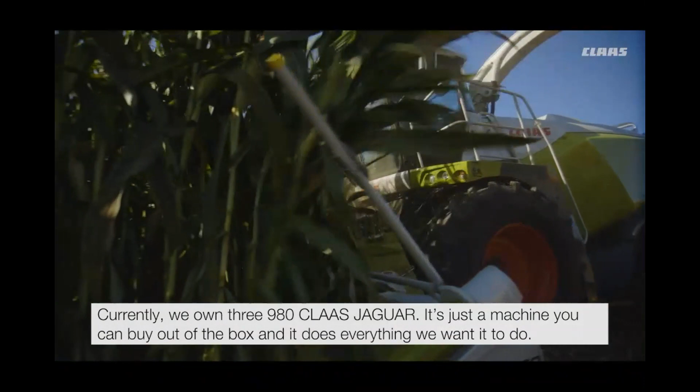My name is Frank Borba. I'm from Modesto, California, and I have a custom harvesting operation. Currently, we own three 980 CLAAS Jaguars. It's just a machine you can buy out of the box, and it does everything we want it to do.

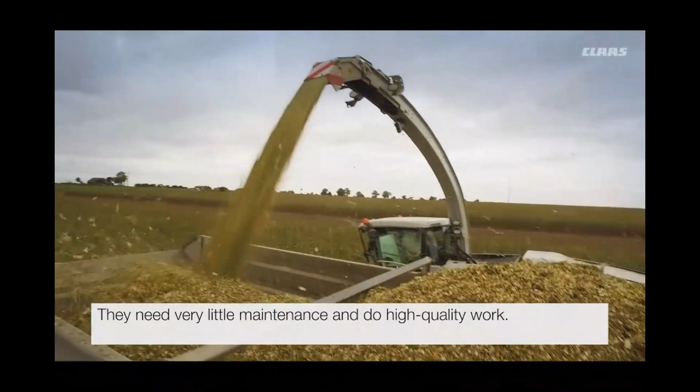I think we've been using CLAAS for 18 years. If there's not a problem, you don't try and fix it.

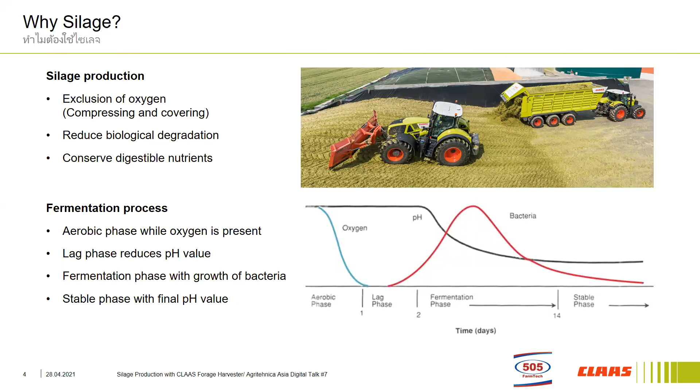Most end users store silage much longer. From day 14 onwards, the stable phase begins, where the silage is conserved in the bunker and stored for a longer time. This means that silage is used as a high quality feed year around.

That's an important point. As mentioned, you need to conserve it to store it longer for year-around feed, so that even when you're not able to grow crops, go into the field, or harvest, you still have a high-quality feed stored in the bunker at your farm. And as Katharina already mentioned, a good silage is not more expensive than harvesting a bad silage.

In most Southeast Asian countries, we now see a change mainly from tractor-attached forage harvesters to self-propelled machines. We'll come back to the technology later, and see why even a bigger machine, where the investment cost is for sure a bit higher compared to a tractor-attached forage harvester, pays back later on. Dr. Ekapop will also share his experience there.

Why does silage quality itself matter? Looking at the effect on milk yield, for example, in dairy products - what can affect milk yield? For sure on one side it's the cow breed. It can also be the season of calving, the geographical region where the farm is located and where the crops are growing, and the frequency of milking.

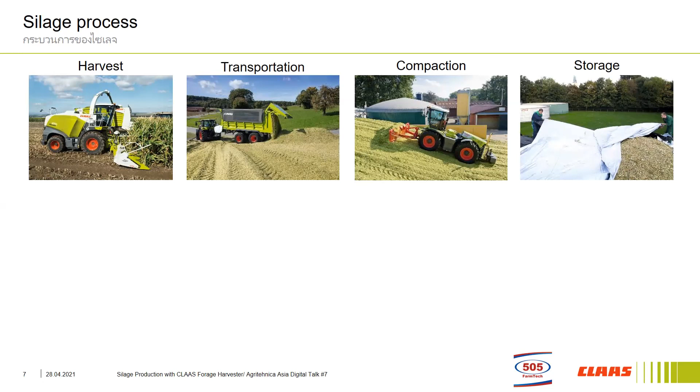Also for storage, covering the material is important later on. We saw in the first video, Jaguar working worldwide, that silos look a bit different everywhere in every country, but there's always a cover foil on top. Some farmers put tires on top, or sand, to hold the foil in place and to add weight on top of the bunker, ensuring that no oxygen can get in and that the fermentation process can start inside the bunker for conserving the material.

What is important here in the silage process? For sure, the right harvest time, so the dry matter content of the harvested plant, is important to ensure that the silage is later on in good quality.

Also, the ideal cutting length is important. We had a trend in the past years that is already going the other direction again. 15, 20 years ago, everybody was cutting the material as short as possible. That is, for example, necessary when you like to feed such a silage for energy production - we will come to this part later. But especially for animal feed, sometimes we have the technology to chop longer, while also having good processing of the material, to increase animal health with longer cut material.

The third pillar here is material processing. There I will mention the difference in the walk around compared especially to tractor-attached forage harvesters, and also what we can do to help the fermentation process. We can add silage additives to the material - that's directly possible with the Jaguar. So the Jaguar can spray these additives on the material to ensure that it can be properly stored later on.

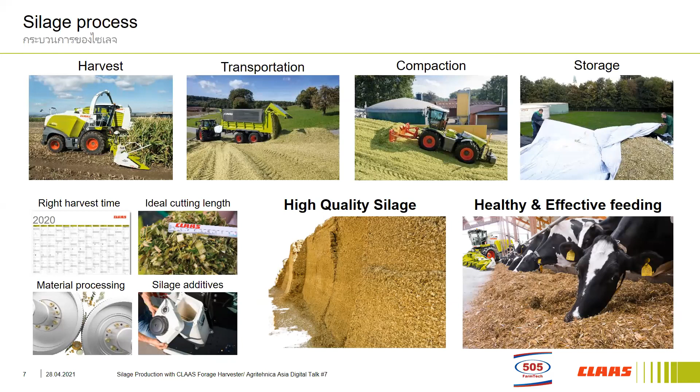So now coming to the point of why a CLAAS Forage Harvester, I would like to swap to a short video which we will present to you. We already produced more than 40,000 units of our Jaguar, which we sold worldwide. I would like to give you a short introduction via the video, which will be shared, and later, directly after the video, I will swap to the live walk around where we see the Jaguar inside via the live camera.

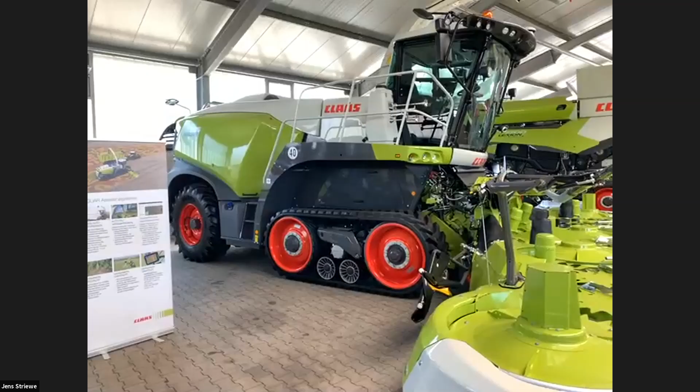Yeah, so I hope you enjoyed the video.

I always get goosebumps watching the video again and again. I never get enough of such a video.

I hope you can see the camera video. Maybe we have the chance to increase the size, or you can do that on your own, to have this live video in full screen.

So in the video, at the end, we saw such a big machine, our flagship, the Jaguar 990 with the track system in the front - that is our newest development for our forage harvester. You saw the history where we started with the forage harvester, and where we are now with this machine. Just as short side information, for Southeast Asia we only sell the wheel machines.

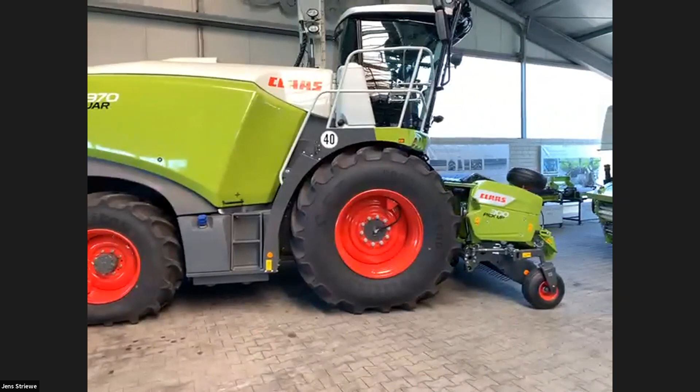So we will now swap from the TerraTrac machine that was the last machine in the video to such a machine, which is basically technically the same, just with a tire in the front, a bit shorter. And here we see our Jaguar from the 900 series. We have an 800 series available and a 900 series - technology-wise, as mentioned, they are the same.

So the principle of our Jaguars is the same in both series. It's just a question of what is the application of the machine later on, how much material needs to be harvested, and what material needs to be harvested, to select the right machine size and specification. When we look into this machine, it looks, I think, pretty nice and shiny from outside, but it's very hard to see what is inside.

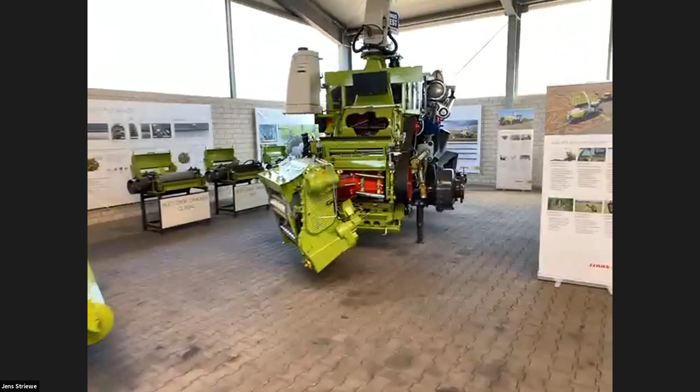But therefore, we will go over now to our model here, where we have basically the heart or the insides of the Jaguar placed, where we can have a detailed look at what is inside. So everything that we see here is the same as it is in this machine, just without covers and with direct access to see everything.

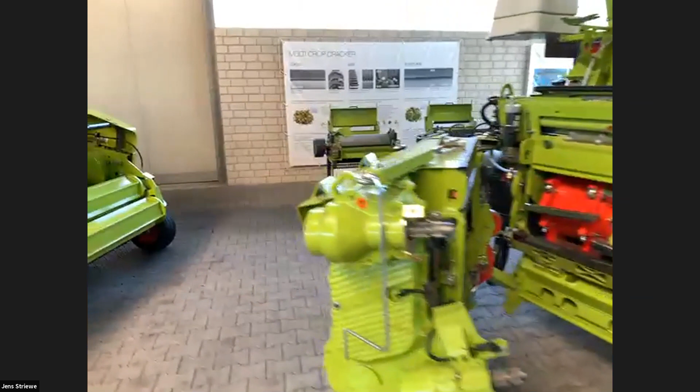It starts for sure with the correct front attachment. So here we can see a pickup - we will see that later in the video as well - for collection of swaths for raked material, for grass collection, for grass harvest, but also for straw harvest as an example in some countries, and later we will see this in a new application.

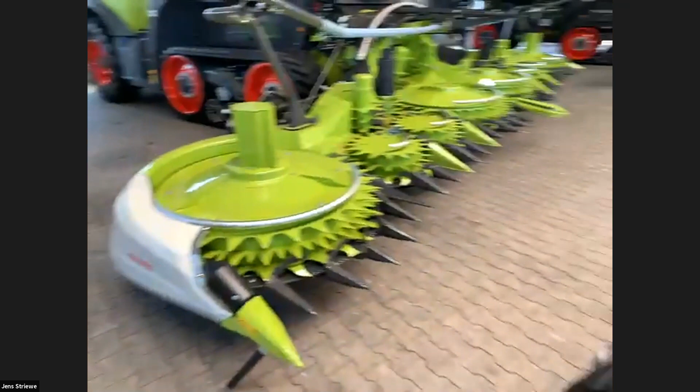It starts with the selection of the right front attachment. This front attachment is attachable, so we can exchange it. Looking back here at this machine, we can see there is a different front attachment for harvesting, for example, corn or napier grass. So that's for direct harvest.

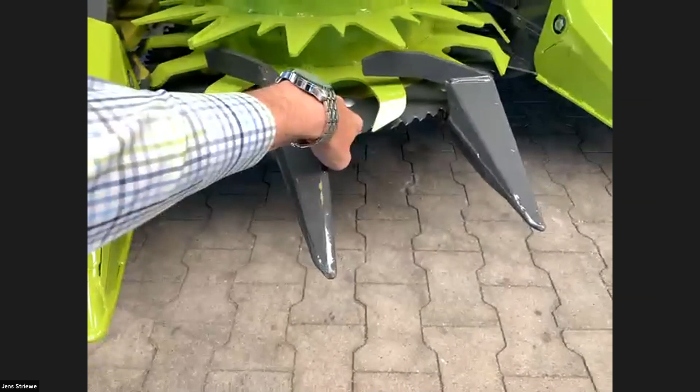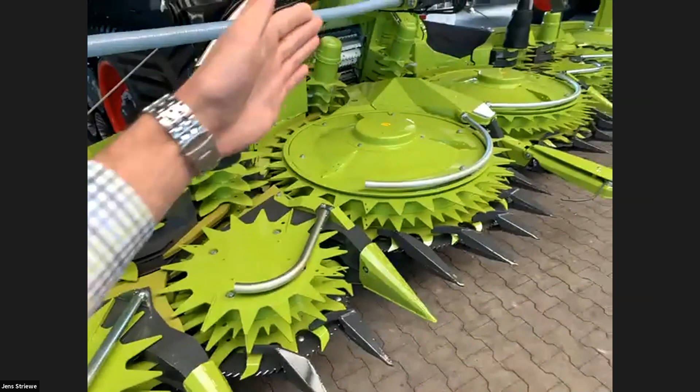We can see here at the bottom the cutting discs on the bottom of the whole drum. The drum turns to move the material inside the machine, feeding it into the pre-compression feeder housing, and that is where our model starts. So that's what we can see here.

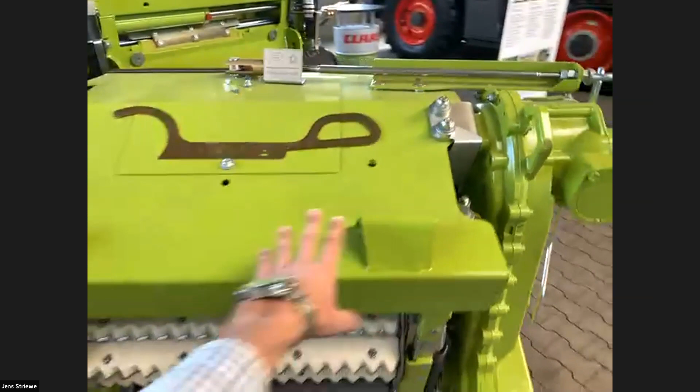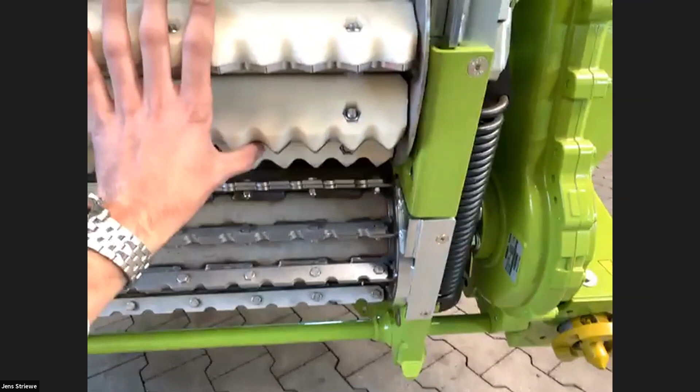These are the hooks where the front attachment will be hooked onto the machine, and the material, whether from the pickup or from the ORBIS we just saw on the front attachment, is fed in between these compression rollers. These feeder rollers turn, feeding the material into the machine, but they also pre-compress the material. You can see these big springs here on the side, pressed together to ensure the material comes in correctly before reaching the cutting drum, because when the material isn't compressed correctly or isn't coming in the right direction, that affects the silage quality, or let's say the chopping quality. So material comes in here.

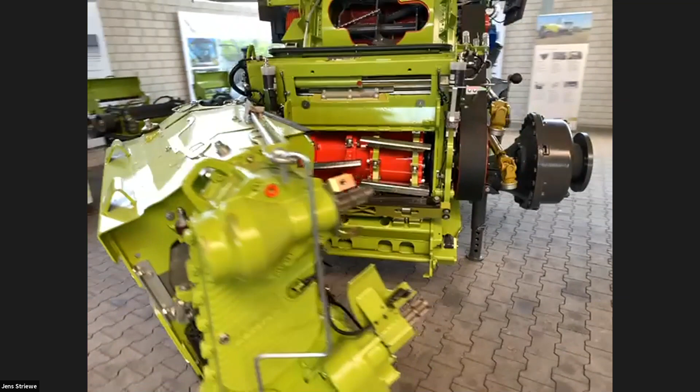The feeder house is openable for easy access to the machine, for maintenance and cleaning points. This is the back, usually closed, just opened now for a better view inside. The material comes from the feeding rollers here on the left.

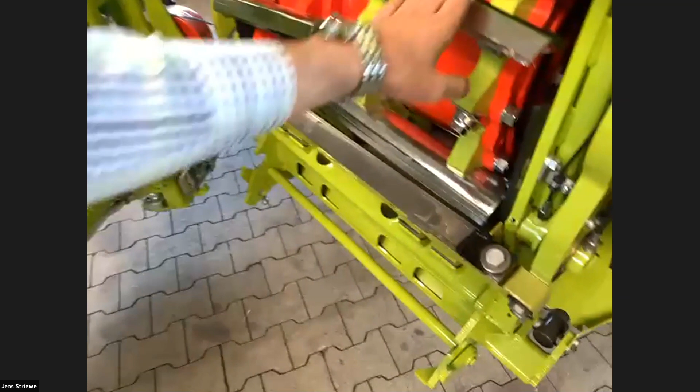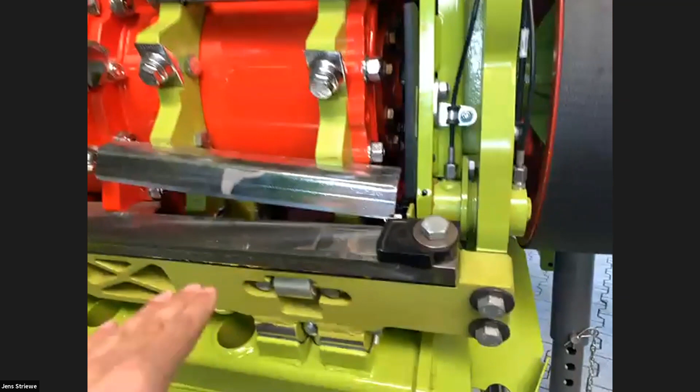It comes into the knife drum here. You can see a really big chopping drum, with the knives bolted on, and at the bottom the shear bar. The material comes in on top of the shear bar. The drum rotates very fast, and the knife cuts the material directly on the shear bar according to the length adjusted in the machine.

We'll later come to the point that we have different chopping drums available for different customer needs. It depends on the application, whether it's for animal feed or energy production. We can select different chopping drums inside the machine, different numbers of knives according to required cutting lengths, and we can also change the material of the knife itself, for example for grass harvest versus corn harvest.

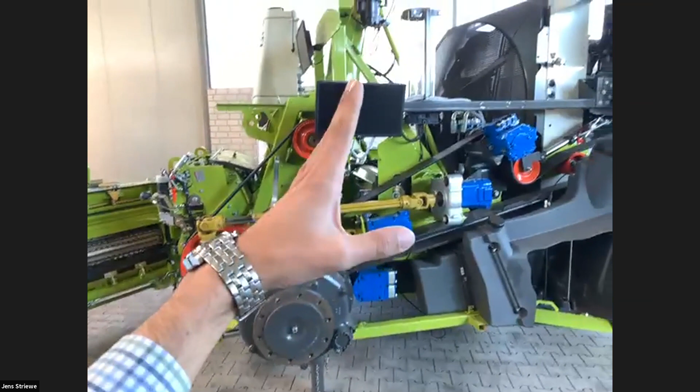So material comes in, we have the big chopping cylinder here. Looking at the side, the material comes in and the crop flow happens right at the beginning of the machine. On top here there's already the spout where the material comes out, right after the cabin. So the whole crop flow happens here at the beginning of the machine.

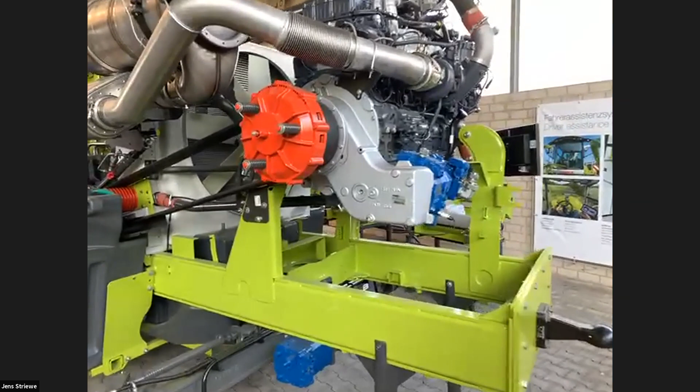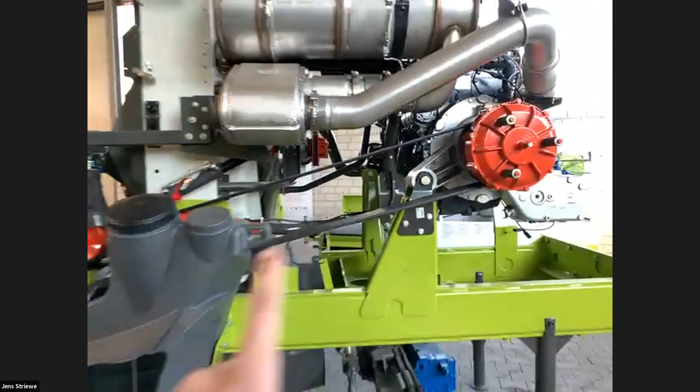In the back we see the cooling package and the power package, the big engine, and the drive concept, something I'd like to mention about our machines. The engine is completely in the back, positioned across the driving direction. On the main pulley of the engine we can see this really wide, big belt, which runs from the engine pulley all the way down to the chopping drum. So we have a direct connection of the chopping drum with the engine, and it's a really big belt, not just a string.

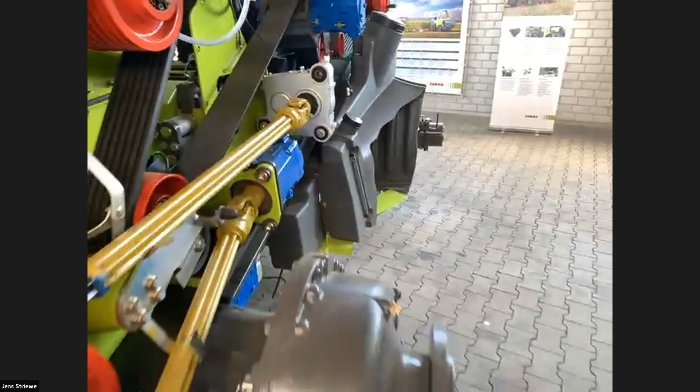This relates to the efficiency point we mentioned, of how to produce silage with a CLAAS Forage Harvester while getting maximum output, running on best efficiency and lowest fuel consumption. This is a key part of that: having a direct connection via such a belt from the engine to all the turning components, rather than big gearboxes where efficiency would be lost.

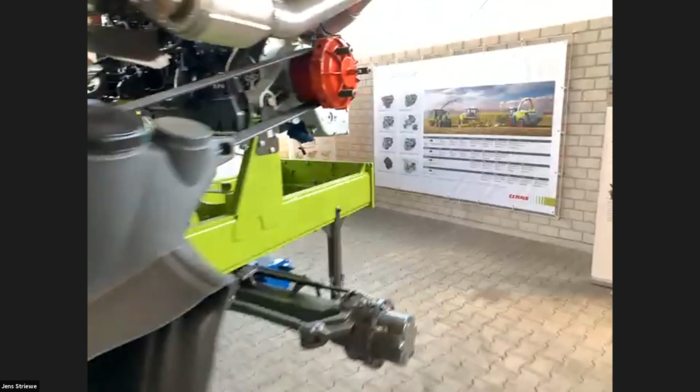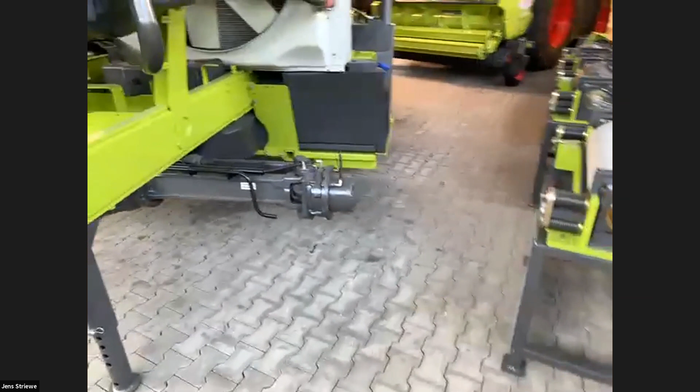Machines are available also with four-wheel drive, which is standard for Asian countries. All machines we sell in Southeast Asia have a four-wheel drive axle as standard, to ensure the machine can work properly even in muddy conditions.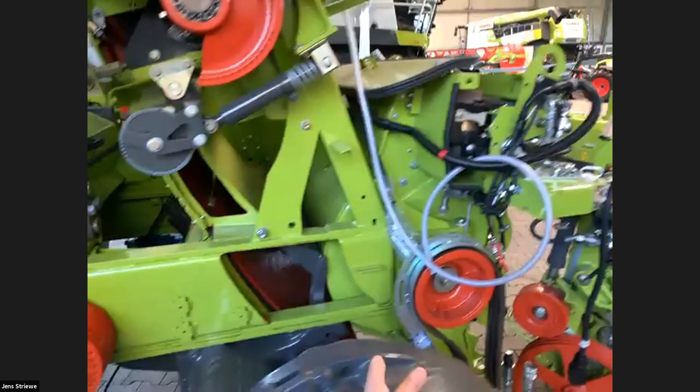Jumping shortly back to the crop flow, we saw this pre-compression unit in the front. We saw here the chopping drum, and then the material comes out of the chopping drum via this tunnel, via this bottom plate here to this position. And here in this position, there's now the so-called grass chute mounted. So here the material, just for grass, is coming from the chopping drum and going up to the accelerator, which is on top.

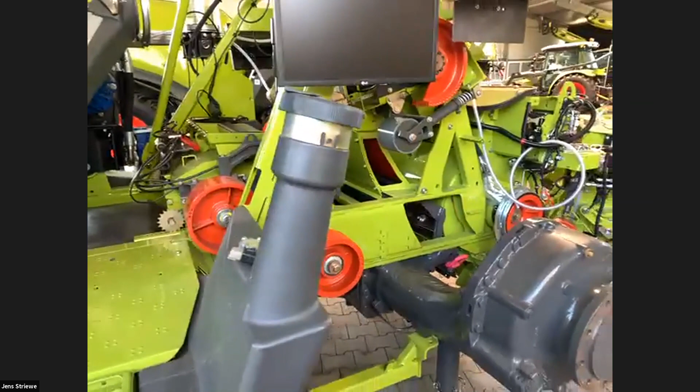But a key component for harvesting corn silage is the corn cracker. We slid the corn cracker out, and this is placed now here behind the crop flow. In this corn cracker, you can see the rollers here inside. We will also see some other variants of this corn cracker. All the material that's chopped by the drum goes through these two cracker rollers to process the material, to crack the kernels, to make the energy which is stored in the kernels and in the material available for the animals later when you feed it.

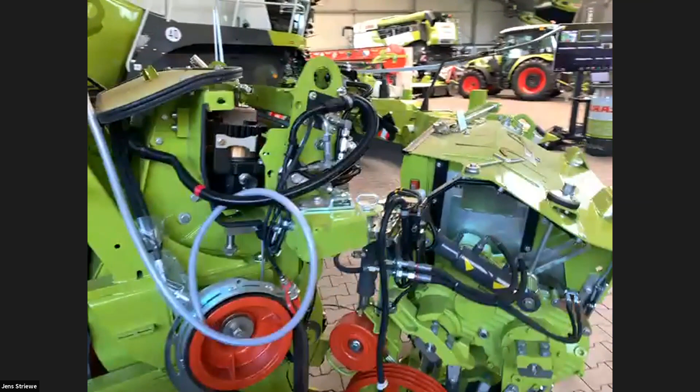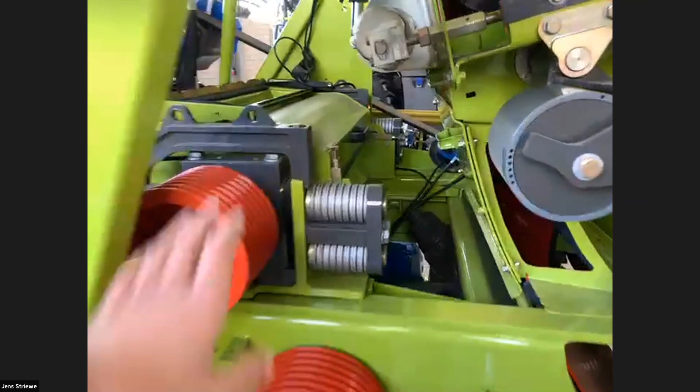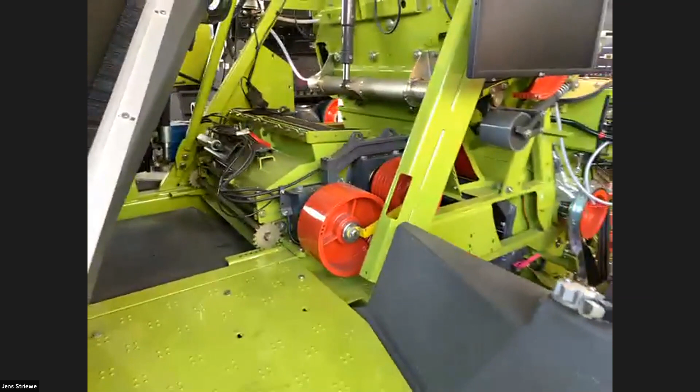So that is a big difference when we're looking at tractor-attached forage harvesters, where on one side we don't have a chopping drum, we have chopping discs. So this difference starts with the chopping, but the main difference is that such a corn cracker is only available in self-propelled forage harvesters. So in a tractor-attached machine, you won't have a corn cracker, and that means that the material is not well processed, and the energy in the kernels, especially in corn, is not available for the animals later. So that is a really key point for producing a good silage quality.

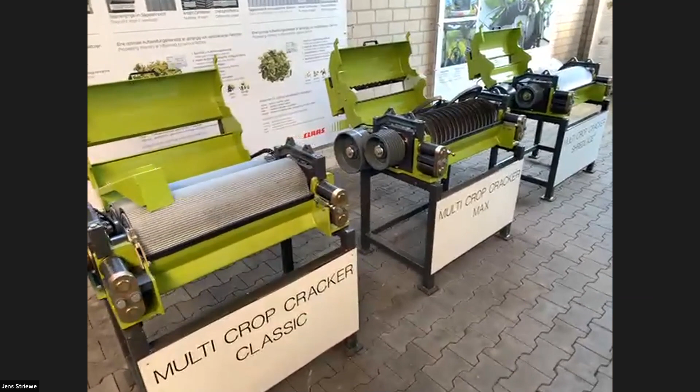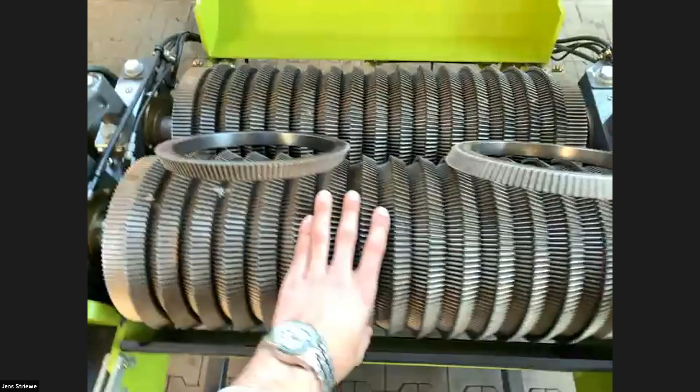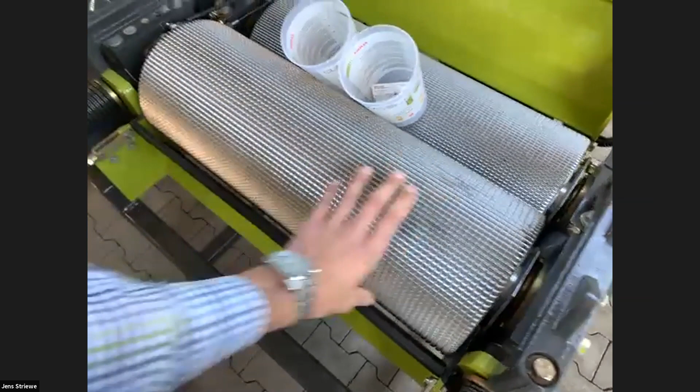If I'm turning around now, you can see that we have here a few cracker models placed. I won't go into details here, but what you can see is the structure of the rollers, which is different on these 3 machines. Here you can see the cracker with ring rollers, or here, we talked about long chopping of the material, that is our shredlage cracker for processing material that is cut very long. So you can see that we can select different crackers according to different needs, and that we have a lot of experience in doing that.

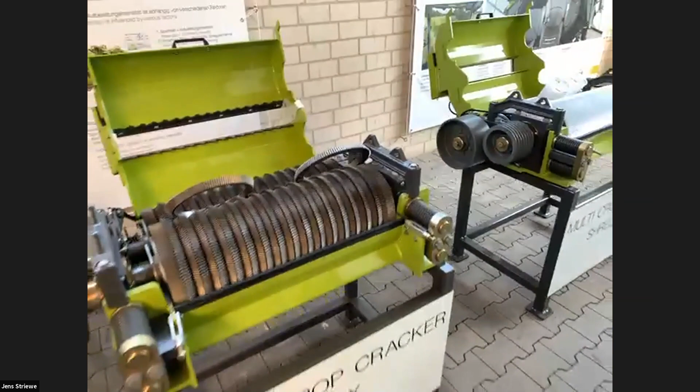And based on the application that the customer wants, we can ensure that we get the right components into the machine, which are also easily exchangeable. So every one of these crackers can fit in this machine that we see here, and we can select it according to the customer needs.

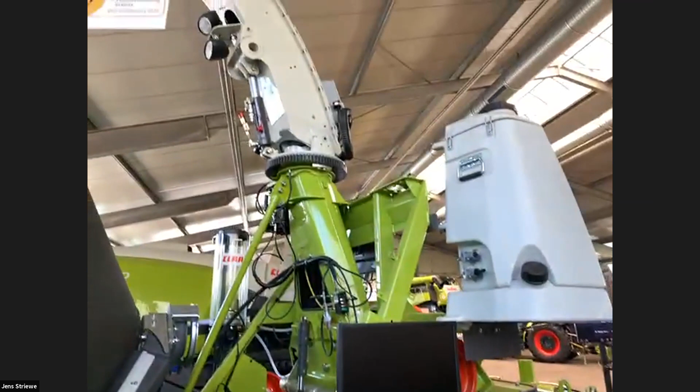Behind the cracker that we just saw, there is then the accelerator coming. It's basically kind of a blower, a fast turning drum, so to say, and it blows the material out of the chute on the top, where the material flies to the trailer, which is running next to the forage harvester, as we already saw in the videos before.

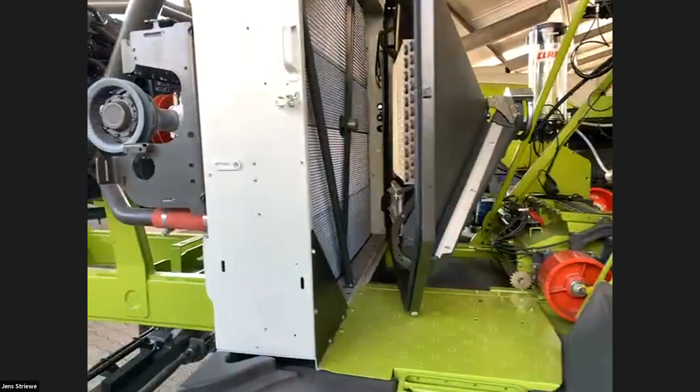Also, when we're talking about efficiency points, an important thing to mention here is the cooling system as well. We see big engines in the back with a few hundred horsepower, and then also an efficient cooling package here, quite a big area. You can see the surface area is more than a square meter, and this ensures that we have the engine always running at an efficient level.

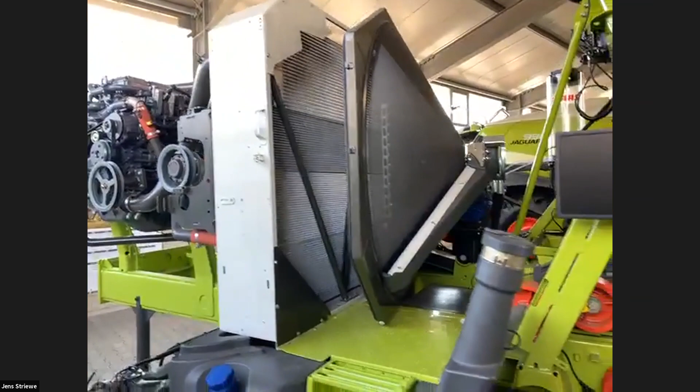Yeah, so we will shortly jump back from this walk around into the presentation to sum up the information that I just gave. I know that for some of you this information may already be known, as you're already familiar with self-propelled forage harvesters. But for some regions, I think it's quite interesting or new information. And you don't always have the chance to look into a forage harvester like here on the model. When we can all go to AGRITECHNICA live again, something like this will be visible. But I would like to give you a short introduction to how the machine looks from inside. So I will swap now and go back to the presentation before we hand over to Dr. Ekapop.

So I will share my screen again. So yeah, we saw here the machine. I need to switch on the camera here again.

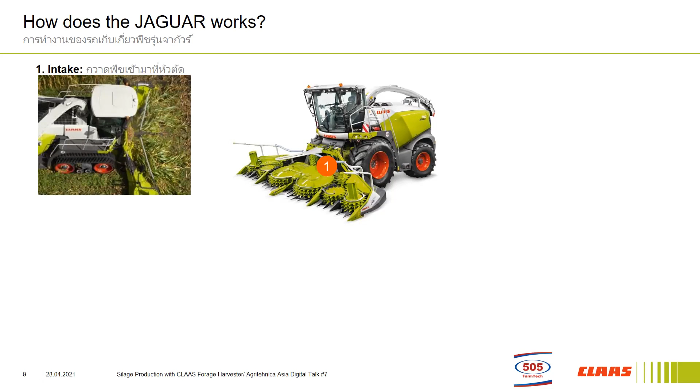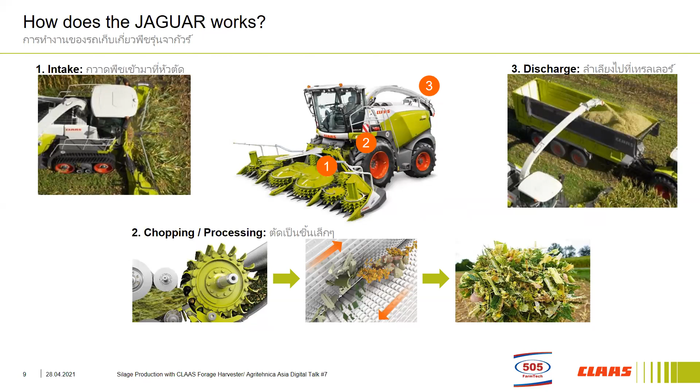The front attachment that we see here, the Orbis, does direct cut and feeding into the machine. Then we had a look at the chopping and the processing of the material, so cutting and processing in the cracker to get good silage out. And then as a back part here, we talked about discharging via the accelerator, via the blower, and also the discharging chute. So here the crop flow is once again visible. You also have the video there on top.

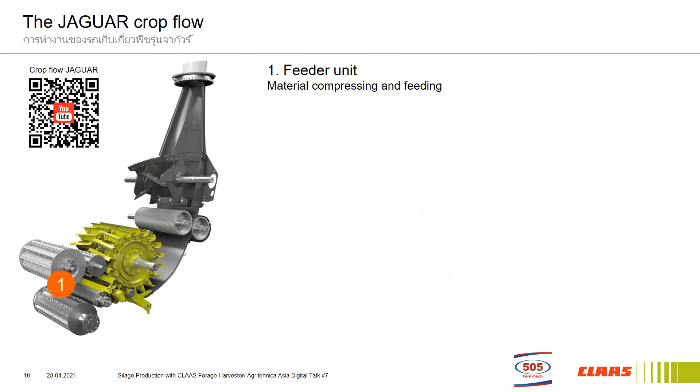Looking at the crop flow exactly, we had the pre-compression rollers in the front, which are already a key component to ensure that the material comes correctly in front of the drum. Then we have the chopping drum itself. You can see here drums available for the Jaguar 800 series, with different amounts of knives that we can select according to the application.

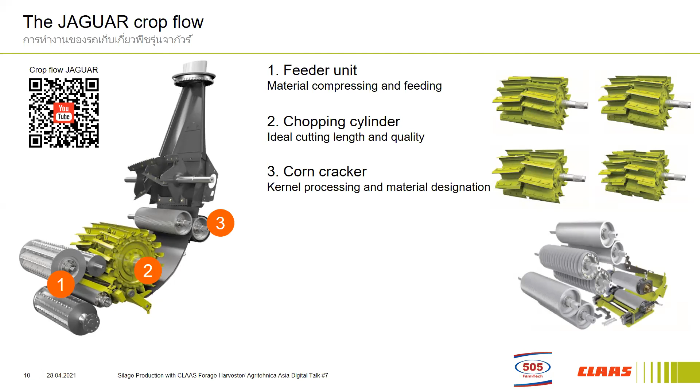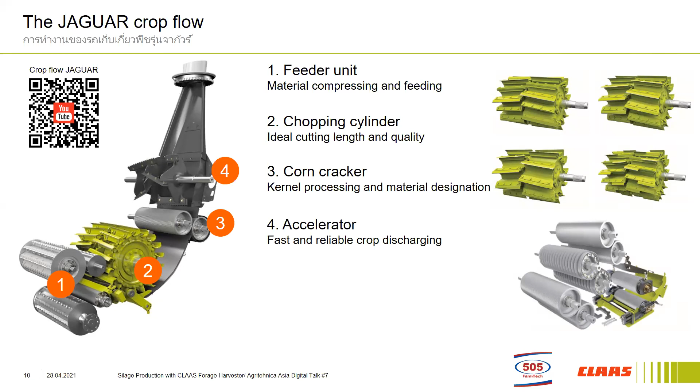You can see here the corn cracker. We talked about the different corn cracker models that are available, from multi-crop crackers via long card crackers to shredlage crackers. They are all available and selectable according to the customer needs. And then we have the accelerator in the back.

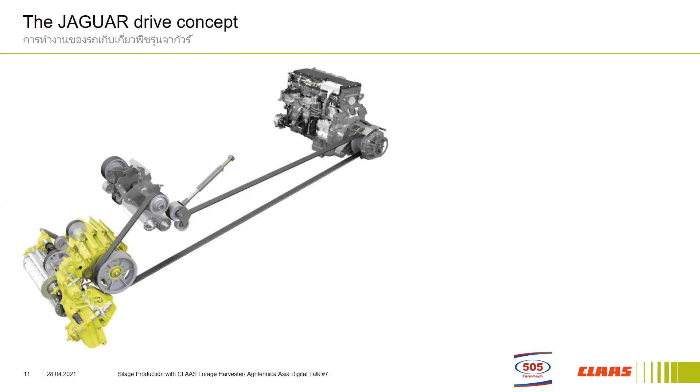Then shortly we also talked about the Jaguar drive concept. That's my last part before I hand over to Dr. Ekapop. We talked about the driveline on our Jaguars, with the engine placed in the back of the machine for a good balance. Then we saw this long, big, wide belt running all the components like the feeder housing, the chopping drum, the cracker and accelerator. So it's all synchronized and running at the correct speed and with highest efficiency via this big belt.

Also, the cooling package we talked about is important for stable engine temperature and cooling of the oil and components. This whole drive concept is for us called the CLAAS Power Systems. That is the connection of all components working together at an efficient level.

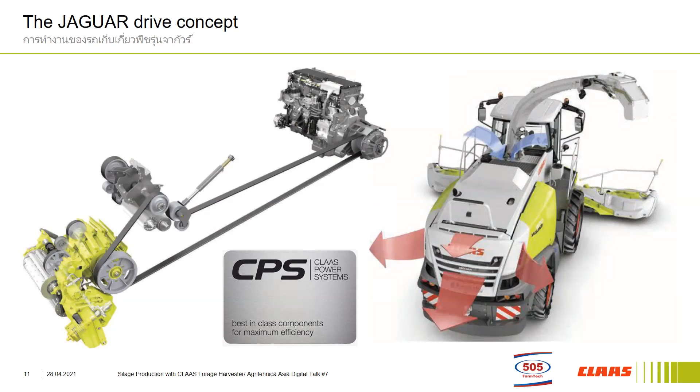So I hope that you saw the live video. I got some messages that the video was not visible. I hope that for most of you the live walk around video was visible, and that this first introduction about why to produce silage was interesting for you. I will now hand over to Dr. Ekapop and he will share his experience in silage production and in using the Jaguar in Asia.

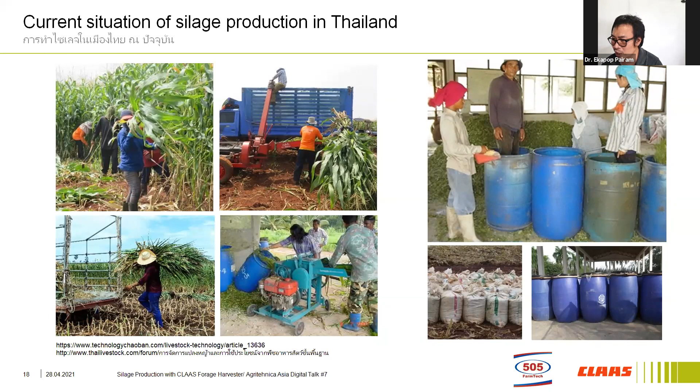So this was also giving us some problems, because before we introduced the technology from Europe, we were also a customer of these guys. So what is the problem that we are facing? The obvious, as you can see in the last picture, is it takes lots of people and long working hours, so high labor consumption and more time consumption. And sometimes it also raises the cost of production because of the time and labor. So that's the obvious.

And then not so obvious, you can also see that it's not something that will last forever, because we use lots of people, and it's very low return. You as the business owner that hires people to harvest, and also the worker, don't get a lot of return. The worker gets less return, and the people doing the hiring also have to pay higher labor costs.

And then also high unexpected risks and unexpected costs, because with the longer time come more problems they have to face, with either drought or sometimes maybe even flood, not shown here. And also reduced silage quality, that maybe has more to do with the storage than the harvest, but nonetheless, it's all related.

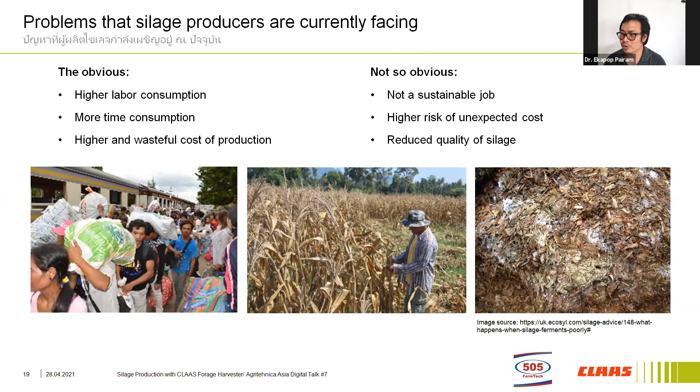And the not so obvious: it would create fewer jobs with skilled labor. So you won't need as many people. You need one more person, but with bigger responsibility. So in the end, that person could earn more for you. So you would be able to pay that person a little bit more to hire him, and he also has more responsibility to look after.

So in fact, that would also help push the labor market in a good direction, and it also kicks off silage production on a larger scale. Larger scale meaning that it doesn't make sense to make a big silo bunker if you have a person chopping, or if you can harvest only one truckload a day, which is like 10 tons per day. It's not going to be very cost effective to make a big silo bunker.

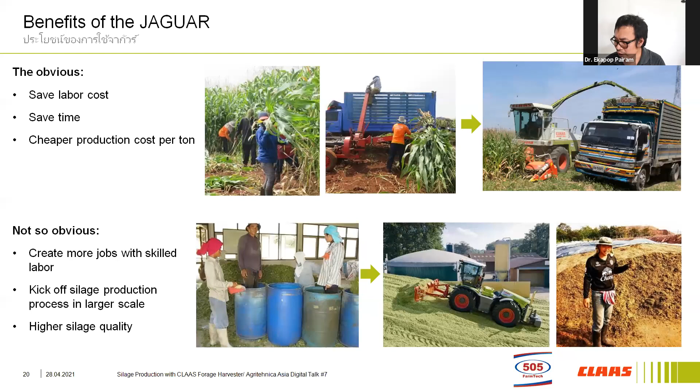And of course, with the bigger scale, you can also plant more, so you could utilize your land a lot more, and you could also harvest on time, and in the end, this will lead to better silage quality in the harvest. So in the end, it also plays a big part in creating the effect. It's almost like the chain effect that will lead to bigger silage production.

So what we're going to talk about now is quickly the trend of silage production in Thailand. As you can see, with the introduction of bigger machines from Europe or from America to Thailand, production will move to a bigger scale because it saves more costs.

So in the end, doing a farm is also business. A lot of people may know that it's something that you do for a living. It's not something that you do for charity. So we all have to make money somehow. So in the end, having the right technology from the start would also really help.

I'm not going to go into detail about the production, about the planting process here. It's also important, but we could leave it for another discussion in the Q&A, and then we can discuss it over time.

And with bigger harvesting machines, you can obviously harvest more in a shorter period of time, and it will save you time to make a bigger silo bunker. And in the end, you could really push it. It will push silage making, and I think agriculture in Thailand in general, toward the more developed level, like in the developed countries, like in Europe.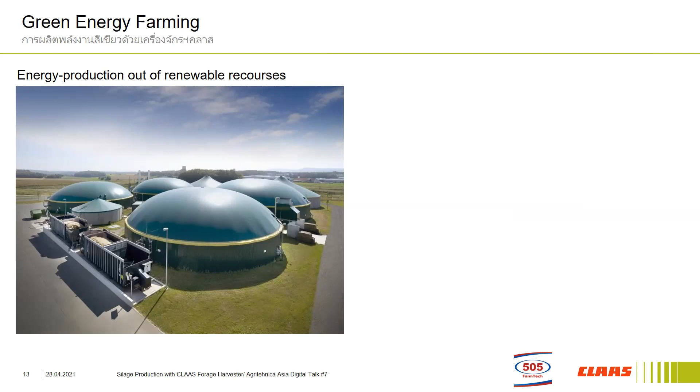I shortly would like to sum up here with the green energy farming part. We talked a lot about good silage quality for animal feed. Just two slides here where we would like to mention that this machine is also suitable for energy production, meaning energy production from renewable sources. We can see here as an example a biogas plant, which runs on renewable crops.

As an example, we can see here chopped corn or chopped Napier grass. Napier is surely more suitable in the Southeast Asian countries for such an application, but also miscanthus, or trash like straw left over from the rice harvest, or the cane trash leaves left in the field after the sugarcane harvest. They can be a source to run such a biogas plant. Looking at the numbers, a 3 megawatt biogas plant needs around 400 tons per day of material.

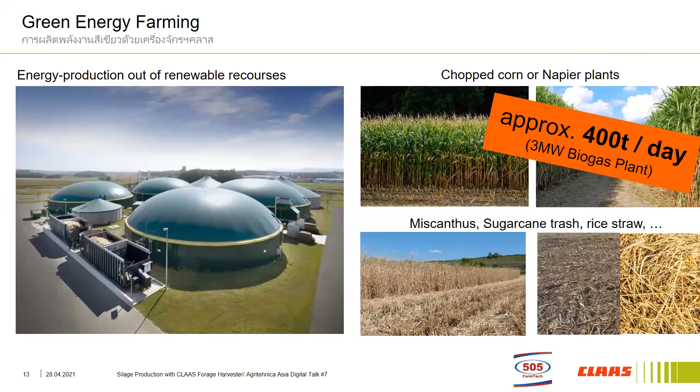And on this number, you can already imagine, or there is a question, how to produce these 400 tons in good quality for the daily demand of such a biogas plant. And now we looked into the machines which are available from CLAAS, which we sell in Southeast Asian countries. And we can see that there are whole solutions available for such biogas operations, as well as for dairy farming or cattle farming applications.